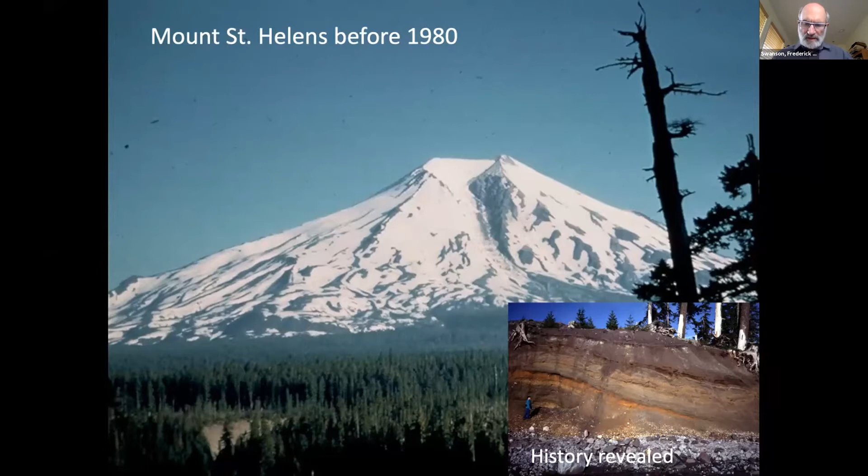But then 2 years later, boom, Mount St. Helens erupted violently on May 18th, transforming the landscape viewed in the upper right corner, looking here north from the summit of St. Helens across Spirit Lake to Rainier in the distance, transforming that forested landscape to the one below.

The cubic mile of the mountaintop peeled off and slid down the valley 12 miles, and a blast toppled the forest over 125 square miles in the middle ground here of this image.

I had the interesting fortune to go to the site marked X in the lower right-hand panel on day 10, May 28th, 1980, with a couple other geologists. And I dug a small pit in the new deposits, and I saw dangling in the breeze particles of the former mountaintop, dangling from spiderweb-like filaments.

I realized later that these filaments were actually fungal mycelia of burn site fungi, which had been triggered by the heat of the blast, although their adaptation to response to heat was an evolutionary consequence of the frequent forest fires in our region. These sorts of blasts are very infrequent and not of evolutionary consequence.

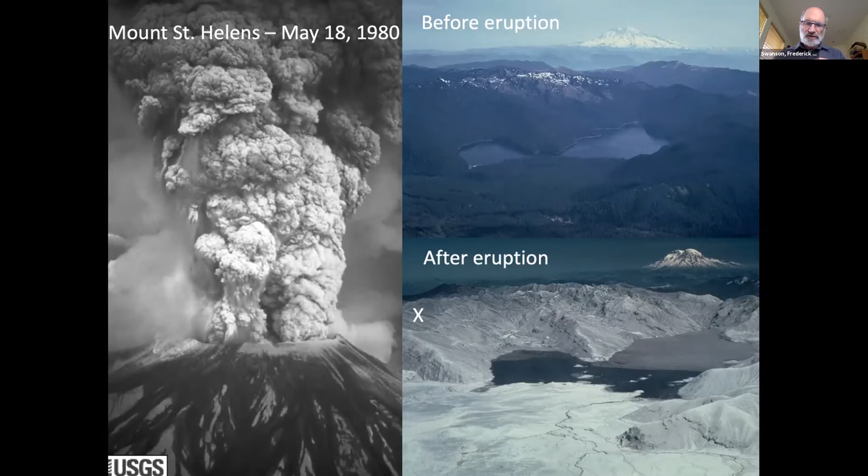I carried on after those early exposures and undertook some studies of the effects of different parts of the eruption landscape on erosion and revegetation.

So here's a sequence of 4 images. The circle shows a helicopter for scale. This was a site about 5 miles east of the volcano. It was a pre-eruption clear cut. You can see the stumps, and the remaining poles from the young plantation forest that was present for the eruption.

In the upper right corner, you can see where gullies had been cut by the early fall rains. And in the lower left corner, plants were coming up from the gully floors. Those gullies had cut down to the old soil surface and then stopped their incision, and the erosion then liberated plants to sprout from seed or rootstock.

This was an interesting aha moment in the sense that normally we think of erosion as detrimental, and in this case it actually accelerated ecological response. In the lower right panel, we see the forest starting to fill in, but it still got a lot of gaps, and tree establishment was rather slow.

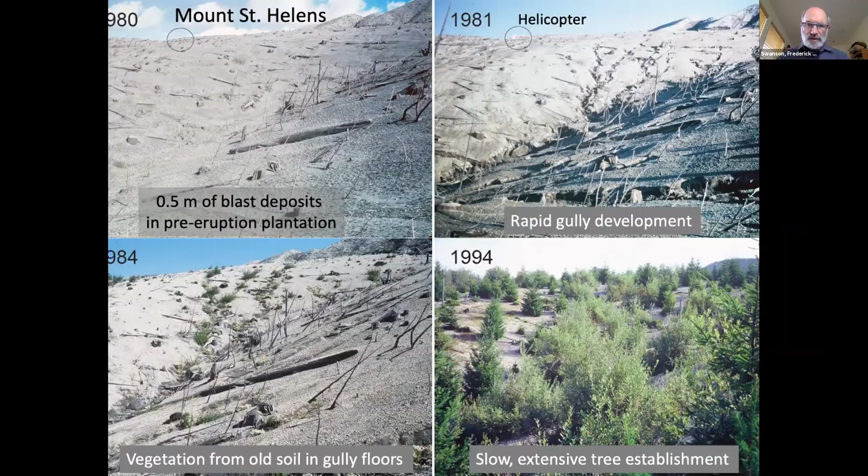So to summarize, these Mount St. Helens observations concerning history: the eruption history led to a prediction of the event. In terms of close-in observations, there are winners and losers.

There was an immediate response of life, and then there's a story about the burn site fungi. In terms of ecological responses, it's been highly varied across the disturbance zones imposed by the different volcanic processes, and that ecological response has been relentless and protracted.

Change in thinking: wow, it can happen here, it can happen now, and we need to really accelerate our hazard assessment and monitoring. The U.S. Geological Survey's Volcano Hazards Program had its budget ramped up tenfold, and that included helping other countries who have volcanoes

It was a venue for conflict. Should we go out there and restore the forest and freshwater environments, or let natural processes proceed substantially unimpeded? That was the language in the 1982 National Volcanic Monument Act, establishing a 110,000 acre monument centered on the volcano. But there were many points of conflict.

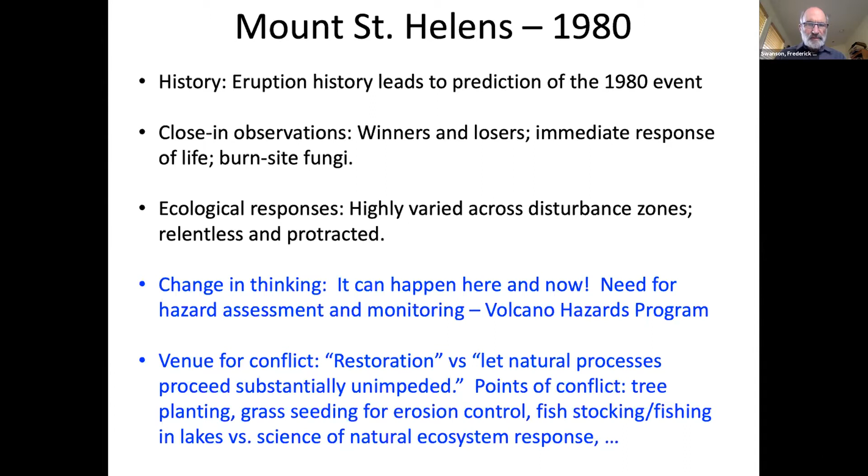Going to the second case, the forest wars. This is an image of old growth in the Andrews Experimental Forest up the McKenzie Valley. The Holiday Farm fire affected about 400 acres of the Andrews. This is a plot — you can see the aluminum tags and the two big old Doug firs here.

Old growth and the northern spotted owl were the subjects of obscure research in the 1970s in the Andrews, but it became a focal point for the battle over the future of forest practices on the federal lands within the range of the spotted owl.

So here's a legacy, a litany of the history of the timber era that developed after World War II in the Forest Service lands.

Ultimately, Federal Judge Dwyer imposed an injunction stopping logging on the federal lands, particularly to deal with the declining population of northern spotted owls. Then President Clinton and Al Gore convened a summit in Portland in April of '93 to try to find a way to get relief from the injunction.

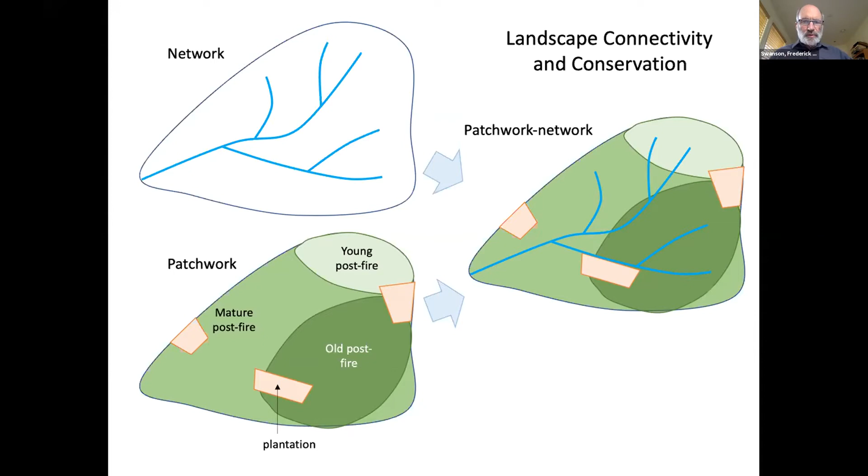So to summarize the forest wars conditions: first of all, the history of the progressive logging of the native forest under the timber era forest policy collided with directions for attention to ecosystems and other matters embodied in some of the federal legislation of the '70s. Other factors in the history pointed towards inevitable big change coming.

Close-in observations and concerns about interactions among networks and patchworks were key to understanding landscape connectivity and function, and therefore were needed in order to underpin how to design terrestrial and aquatic conservation strategies in concert with one another.

The ecological responses have been striking. We could foster old growth forest attributes in the landscape, but still see the spotted owls decline due to various factors such as wildfire, disturbance of good habitat, invasion of the barred owls, and perhaps other factors.

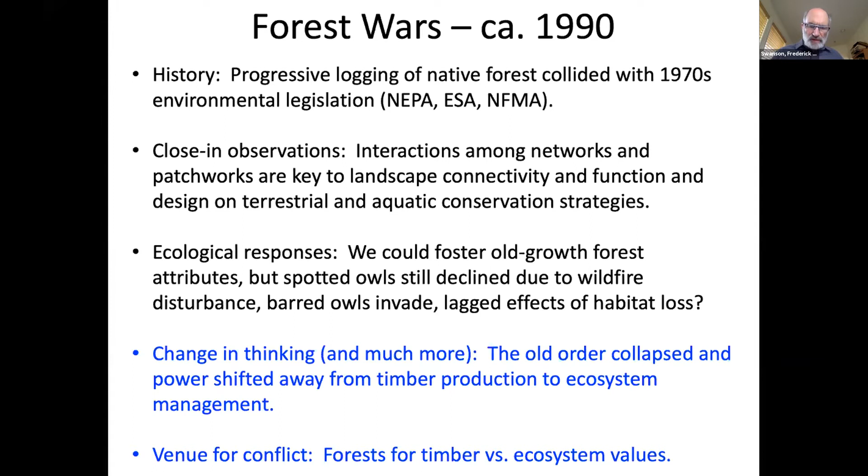So this change was a big change in thinking with huge impacts on people. The old order collapsed, and power shifted from the emphasis on timber production to ecosystem management. Here again, we had a venue for conflict over our values about forests.

The '96 flood is the third case, along with some other folks in yellow raincoats there. I had the opportunity to hang out in the forest during the flood and see its progressive development over several days. It was fascinating as we could see the passage of the flood wave, the debris flows,

the movement of large wood and boulders down through the landscape from the upper reaches of the watersheds and on down, ultimately to Portland. It was a big rain-on-snow event — note the snow there.

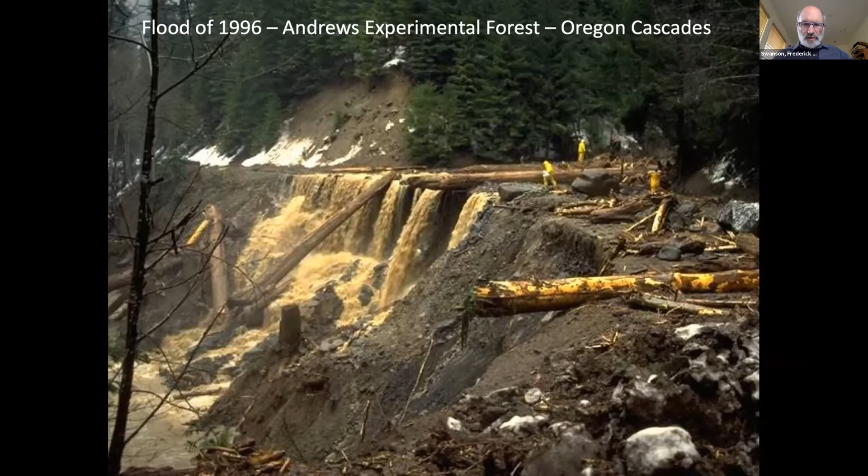His work has been done on the history of floods and their origin as rain-on-snow events. These are the events that make the big ones, but they're infrequent. We had the Christmas '64 flood, and then this '96 flood, and some earlier ones.

We have some long-term stream flow records indicating that they recur at intervals of multiple decades.

The close-in observations were about how the disturbance processes cascade down through river networks and road networks, and how those roads and rivers interact with one another. We'd had some long-term observations of aquatic ecosystems in small and large streams, and we could observe the impressive ecological resilience of the aquatic system to disturbances such as this.

We also had a change in thinking, that notion of roads interacting with streams to influence the routing of water, sediment, and disturbances was a critical perspective. Then that came into play in the conflict venue, which was to find the right balance between forest access and environmental hazards posed by roads, and how far to go in the name of watershed restoration with disconnecting road networks from stream networks.

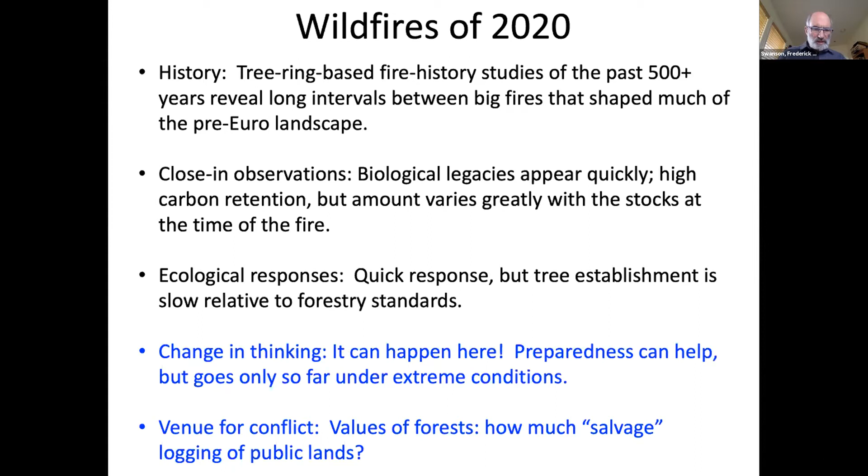Change in thinking again—it can happen here. Preparedness is helpful, but it goes only so far under extreme burn conditions, which we suffered in September. And again, this is a conflict venue, over surfacing our values of forests—for example, how much salvage will be deemed appropriate in the course of logging of public lands.

So some take-home lessons: big change events may seem like surprises, and yet they're expectable. On-site observations can prompt science discovery. Ecological and human systems are quite resilient, but they may occur at inconvenient timescales. There's plenty of need and capacity for new disturbance research, but the big challenges are human, are social. Expect uncomfortable change, and conflict.

For just a moment, let's step back and ask what's next. What is the pace of big disturbances in our region? Here are four cases—let's push your thinking back to 70 years or so.

We had the '62 Columbus Day windstorm, we had the '64 flood, and we have the pandemic. So we've experienced one big change event per decade on average.

And what might be the next big change event? Well, we've got plenty of candidates. We've got the familiar ones, big fires, but also ones we haven't experienced in our European occupation of the landscape, like a big subduction zone earthquake and associated tsunami.

So despite preparedness, our vulnerabilities may be increasing. There's concern about our infrastructure, communications, power and transportation.

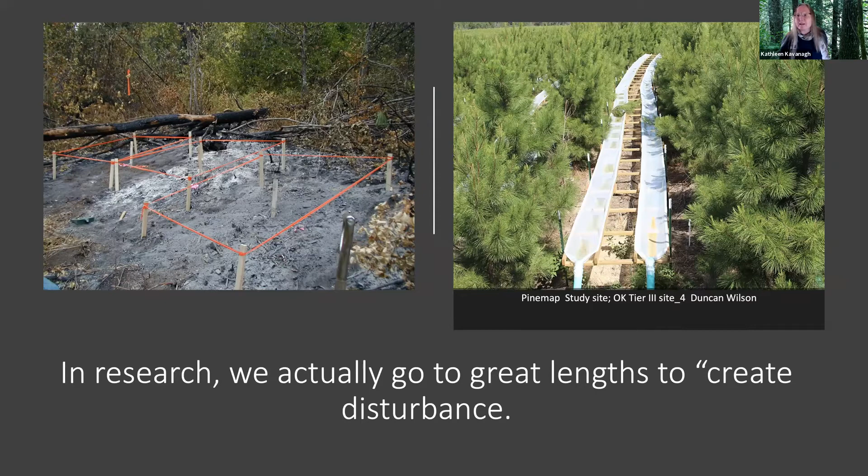So you've had a disturbance, and you've got to think to yourself as a researcher: what can you do following a disturbance? What's your response? As Fred so aptly said, the response is to get there, to open up the senses and think about what it is you can observe going on. And then the other part is we have these new tools in terms of remote sensing and a lot of other things that can help us see things from literally the 10,000 foot level. But how do you think about that in terms of research?

So if you think about who embraces conditions created during a disturbance, a disturbance that many people don't think about that relates to the natural environment is COVID, and basically the shutting down of human movement through big swaths of the United States. There was a massive response that was quickly noticed when the national parks closed.

All of a sudden bears were having parties in Yosemite, and we were seeing wildlife thriving. They were also seeing different species of wildlife in different parts of the parks. The people managing the parks often stayed behind, and they'd see, whether it was pronghorn in a part of the park they'd never seen pronghorn before, and didn't realize was even pronghorn habitat. So a lot of anecdotal thinking came out of that.

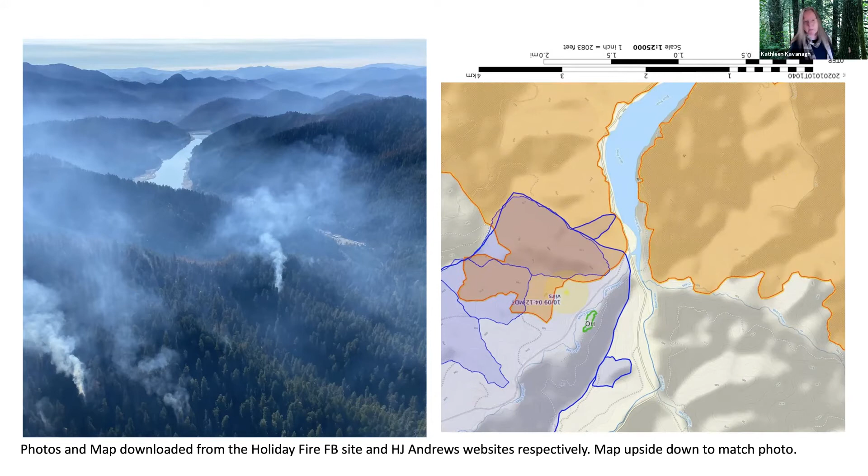They both had a fire. It wasn't as hot as the majority of the Holiday Farm fire — it was near the end when the fire came into this drainage. Suppression worked fairly well, but there was still a nice burn in the understory.

So, large changes. One of the interesting things is that the H.J. Andrews and the researchers there have decades and decades of data on how this system behaved under a variety of weather and storm conditions, and now they'll get measurements on how it responds to this disturbance.

Because this is heavily instrumented, with plots all over these watersheds, that assessment will be ongoing. It's almost the best of both worlds in this case, because the whole forest did not burn up, but at the same time some fire came into key places that will allow us to study and understand more about the processes that occur when a fire does happen.

Another critical site is one we have in the Metolius region, called an Ameriflux site, run by Bev Law for the last 20 years. It was burned over around August 20th, so before the Holiday Farm and many of the fires we saw on the west side, the east side was having its normal fire season.

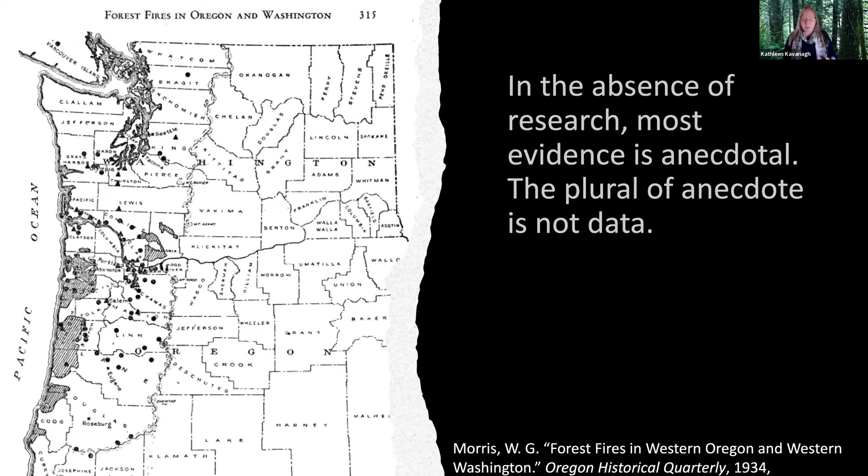As we look into the future, one question is how much we can rely on the past. If something developed anecdotally and we think we understand why and how, but we don't really have the data on it, we need to use the information we're currently developing to help us project into the future.

And that's where the data comes in. That's where the data becomes essential.

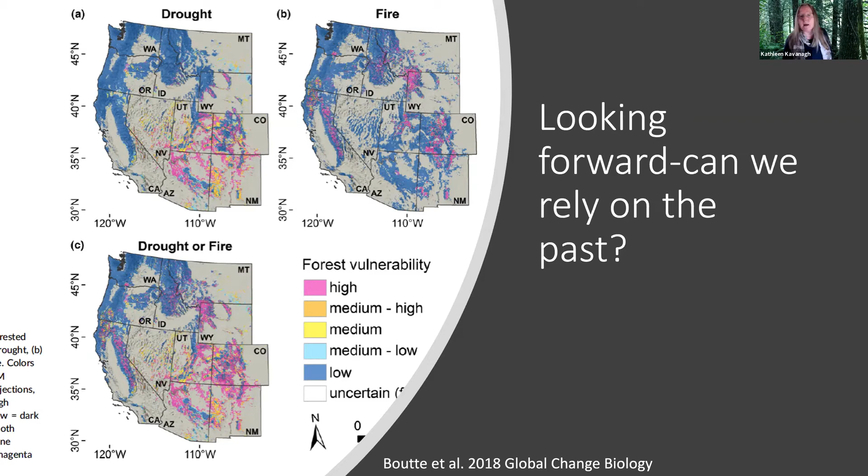We've had to respond to COVID also within our research community. So how have we responded? One of the things we initially did was basically shut down the system, no travel, everybody go home. Then slowly we were able to rebuild to demonstrate we could travel safely.

We could continue, especially to do our field research very safely. We were able to have over 247 individuals permitted to travel to go out and collect the data that was essential to keep the research enterprise going through COVID, and to collect data essential in terms of the timing and history of the record we needed to capture.

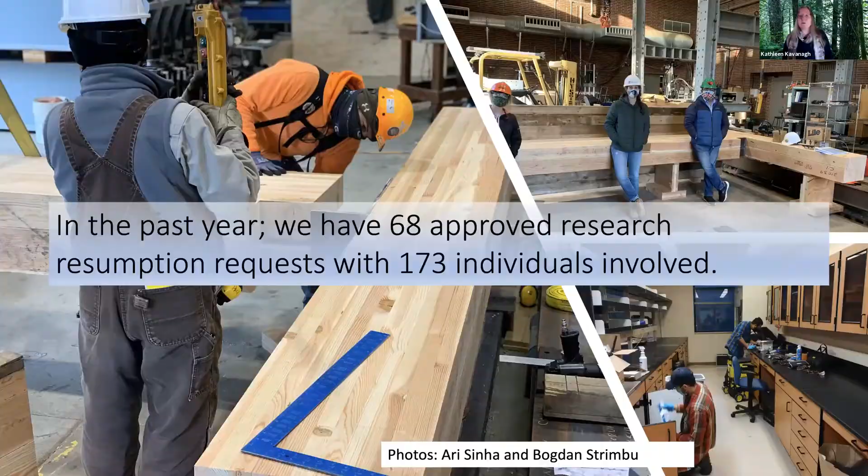We also worked very hard in terms of research resilience to get our field and indoor researchers going again, trying to figure out the best way to do that in a safe manner. We went through a massive assessment of research and what we could approve, and what safety and COVID-related changes we had to make. We had about 68 approved research resumption requests with 173 individuals.

So again, much like the resilience of the natural system, we also saw a lot of resilience amongst the human system and amongst the research we were conducting.

In closing, I'd like to say that we look forward to a future in forest research that does involve disturbance, that occurs at process level research integrating disciplines, much like Fred talked about as well—biological, physical, and social sciences really need to come together as we think about these things.

We'll work across multiple scales, from large wildlands, outdoors, and managed forests, all the way down to the sequencer lab—whether we're studying eDNA, tree improvement, or whatever, we're working across multiple scales.

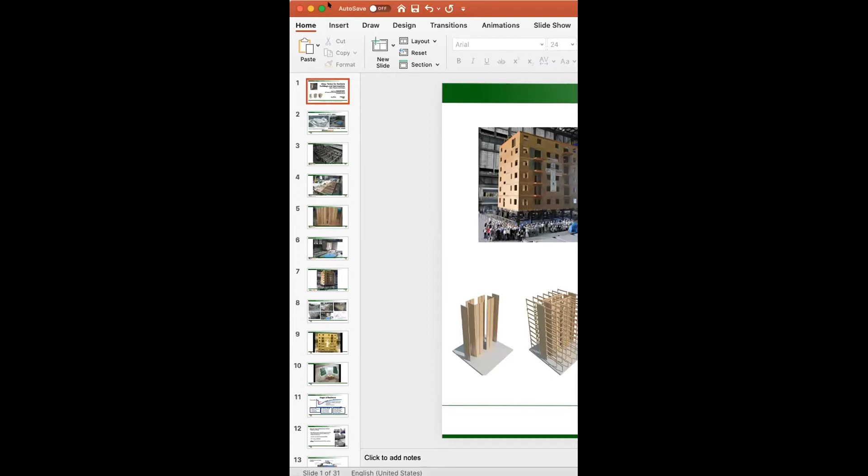So let me introduce our next speaker, John van de Lindt, currently the Harold H. Short Endowed Chair Professor in the Department of Civil and Environmental Engineering at Colorado State University. John has conducted nearly 50 research projects on buildings and other systems related to earthquakes, hurricanes, tsunamis, tornadoes, and floods. Between 2005 and 2013, he led projects that used the world's largest shake table to run tests on 2-story, 4-story, and 6-story wooden buildings—I think we're going to see some videos of those during his presentation. John serves on the American Society of Civil Engineers Executive Committee for the Infrastructure Resilience Division, and he's secretary of the Structural Engineering Institute Executive Committee.

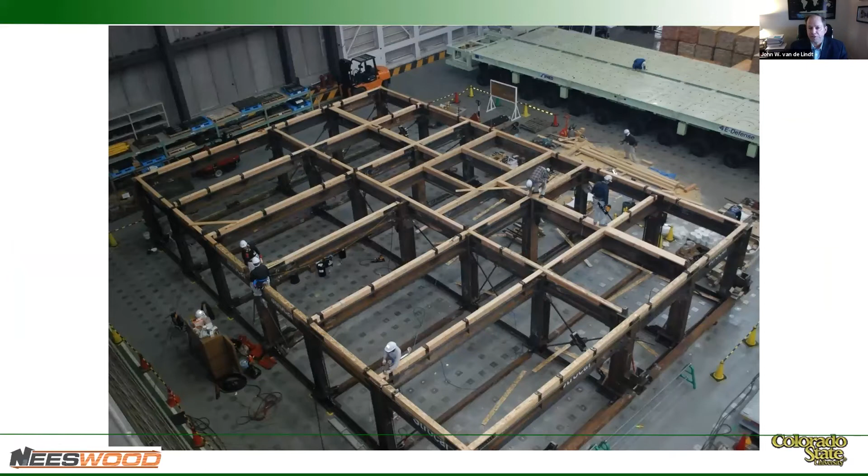Here you can see this is a steel moment frame that's going to be used to lift it onto the table. You can see our interface, and I'll go through this kind of quick—I want to make sure we have time for Q&A. I think the photos can do it justice.

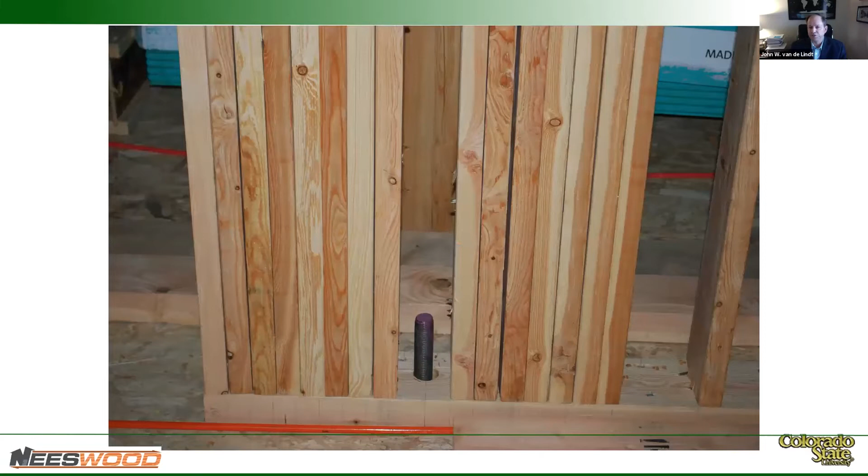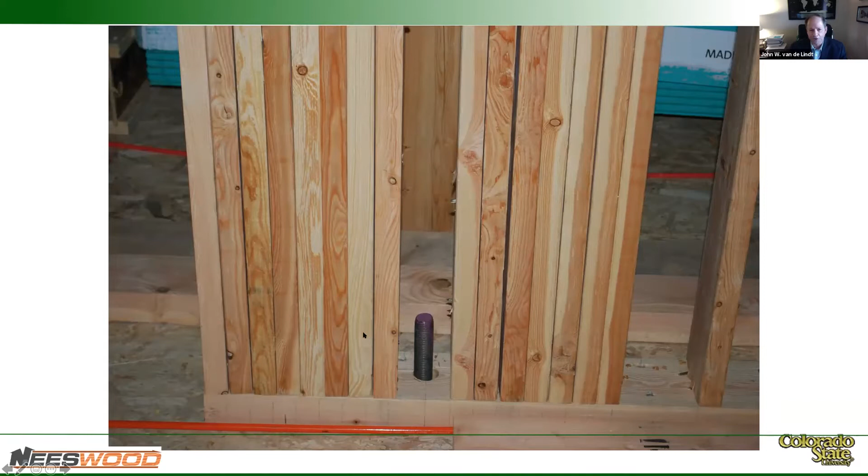Here we see what's called a stud pack at the end of a wall. Then, to take tension, we'll have steel rods that go up the height of the building. The building will be 6 stories in this case. The goal here was to design this using a new method at the time, called performance-based seismic design. That method enabled a certain level of performance for a certain intensity earthquake.

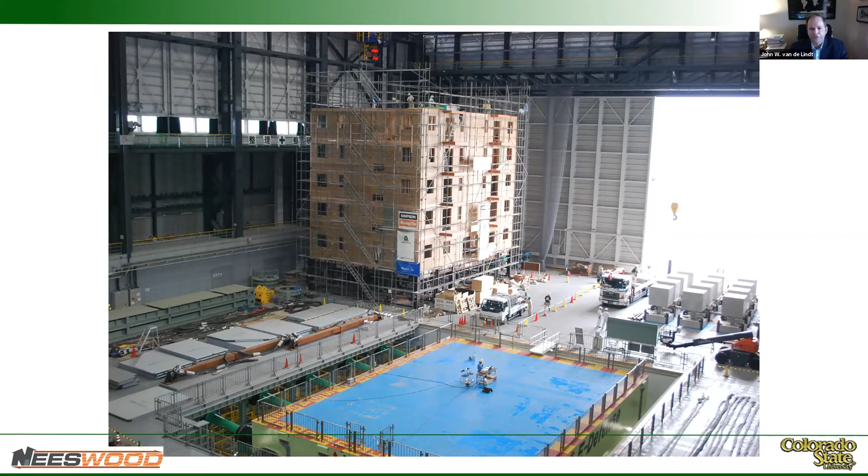Here you get a feel for the lab up to 5 stories. This is test day—there were a series of test days of smaller shakes, and then this is the big one. This is the damage inspection crew that goes in; we only have about 90 minutes to inspect the damage until we run again. That's why the crew's so large—I think I'm down there somewhere.

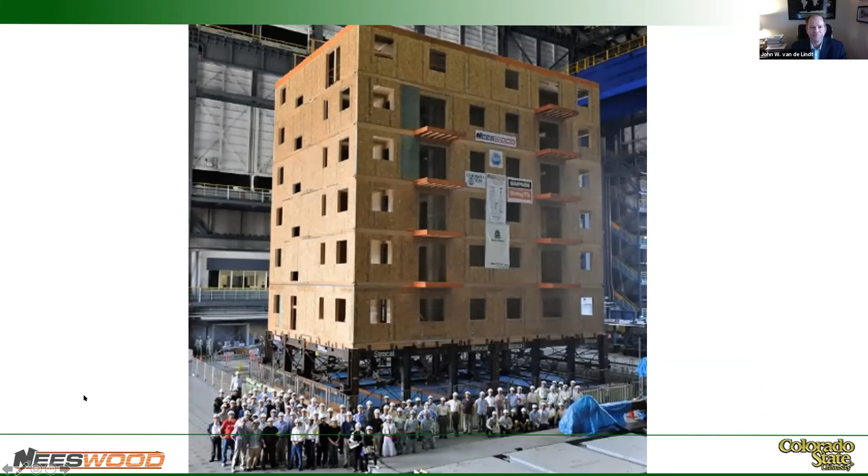This gives a feel for some of the construction over time. Here's the shake—I'll start this since there's a little lead time. You can hear them counting in Japanese; they'll then count down in the control room again while they check instrumentation. This building weighed about 800,000 pounds, used wood and wood products throughout, plus connectors, and had more than 1 million nails.

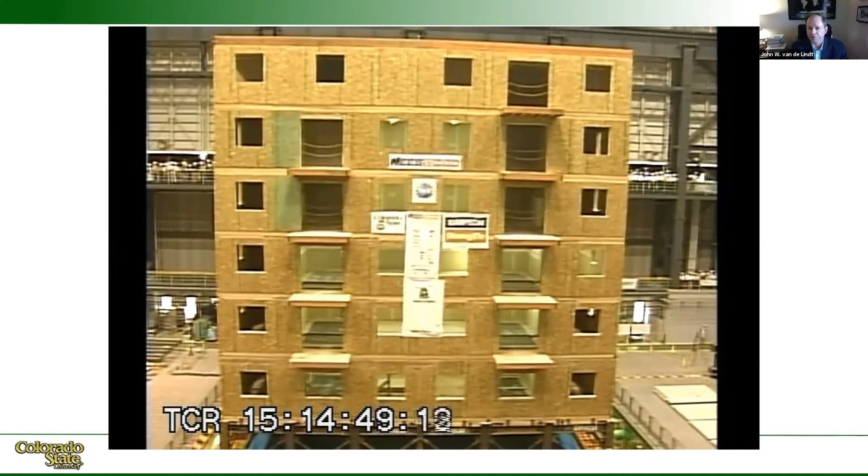Give you a second to reflect on the movement. It's fairly stiff, and that's what we want to see—some stiffness, but to get good performance we don't want to see it displace too much for fear of collapse. However, when you get displacement, this is up on the 6th story, set up to look like someone's kitchen nook. This is about 35 feet up in the air. You can see people watching from a platform down here—they're far enough away, they look close, but they're not.

What happens is you get the stiffness, and it increases the accelerations. So now you're going to see what happens with acceleration.

And so these are, to use Katy's words from earlier, these disturbances we create because we can't wait. We can't build a building and wait years, decades, even longer to study earthquakes.

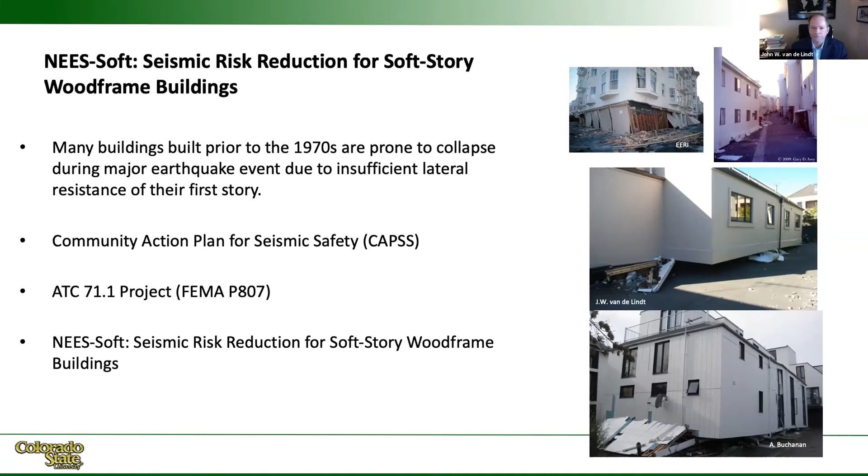And of course, similar to Mount St. Helens, we can't predict exactly when.

So this project, we looked at a number of different retrofits, had construction, testing, and I'll run through that in just a second. We used cross-laminated timber rocking walls as a retrofit. We partnered with a corporation to look at steel special moment frames just in the bottom story so the tenants wouldn't have to move out. These are often 4-story rental buildings.

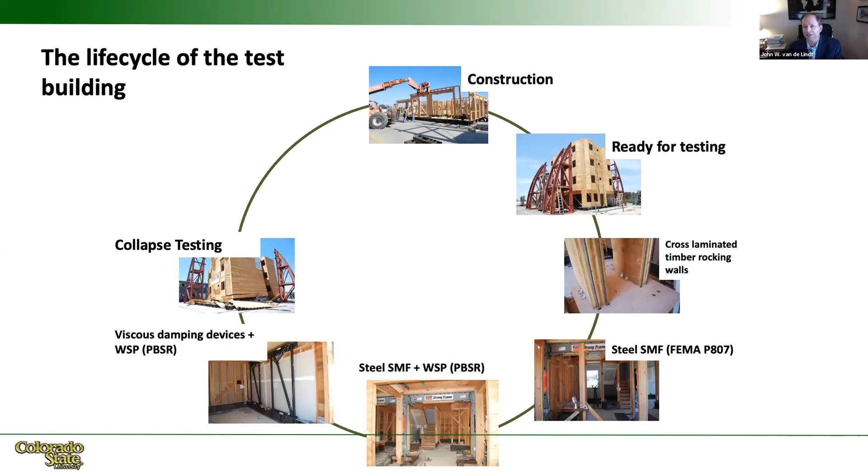Ultimately, we took all the retrofits out and performed a collapse test so that we could develop models and understand how these buildings collapse and how you model collapse.

So just some quick construction photos. The steel is just an interface plate to get into the table and fasten it down—that would be like your concrete foundation in your house. These are soft story buildings, meaning this is a very soft and weak story. On this first story, you can see these huge garage openings, and the fact that there's really no stiffness in that bottom story to resist the motion.

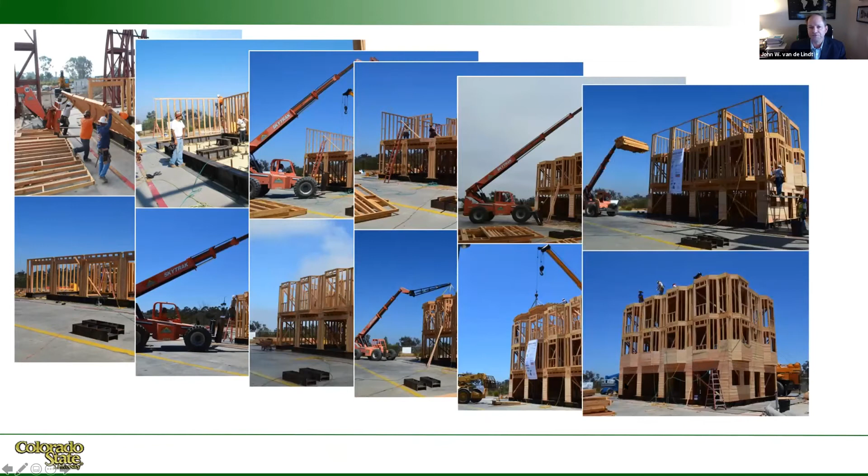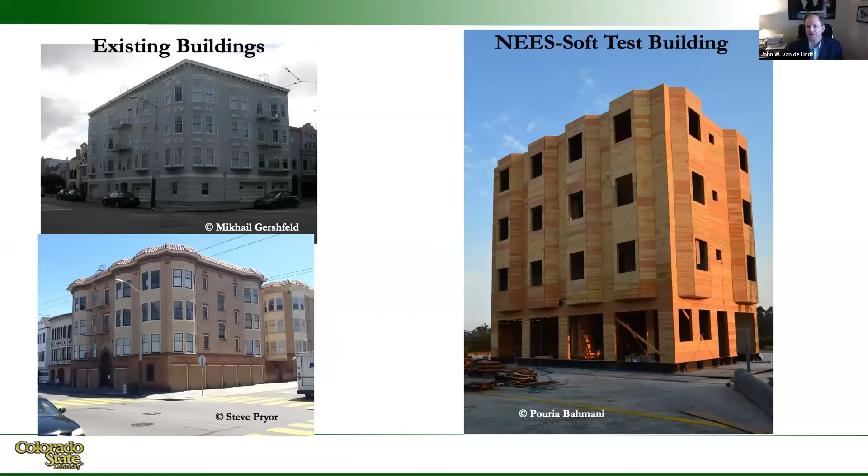So these are the buildings that we're trying to model. In research, we can't pull one of those out and test it on a shake table, so we do as much as we can to reproduce that. Here you see our reproduction on the shake table to the right.

So in the interest of research, as I mentioned, we had tested all the retrofits. We pulled those out, and then we looked at the collapse of the building.

You'll hear a very enthusiastic research undergraduate student who's doing the filming here in a second. He helped construct the building, so he was entitled to narrate, apparently.

And so this is a very large ground motion. This is what's called a maximum credible earthquake, so this has a return period of 2,500 years. We wouldn't expect this, we don't expect it to occur, but again, it's a return period—it could occur at any time.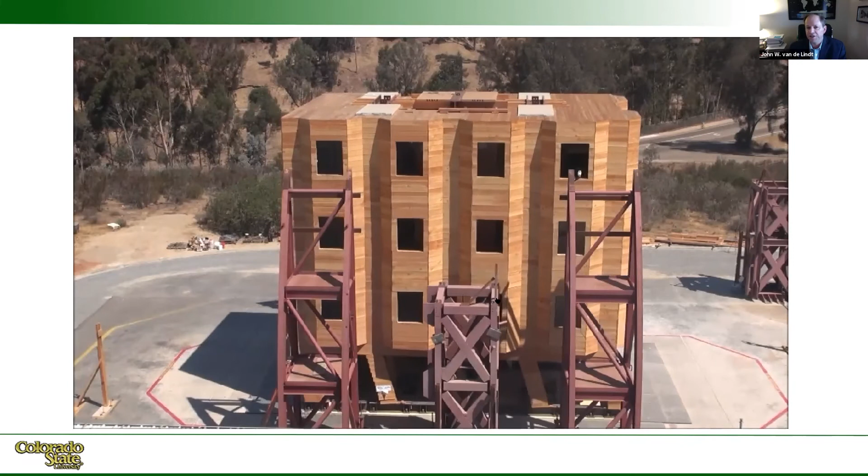And then these towers are just there to protect us, because you can see we need that. We're actually sitting right behind here in a 2-story building, so.

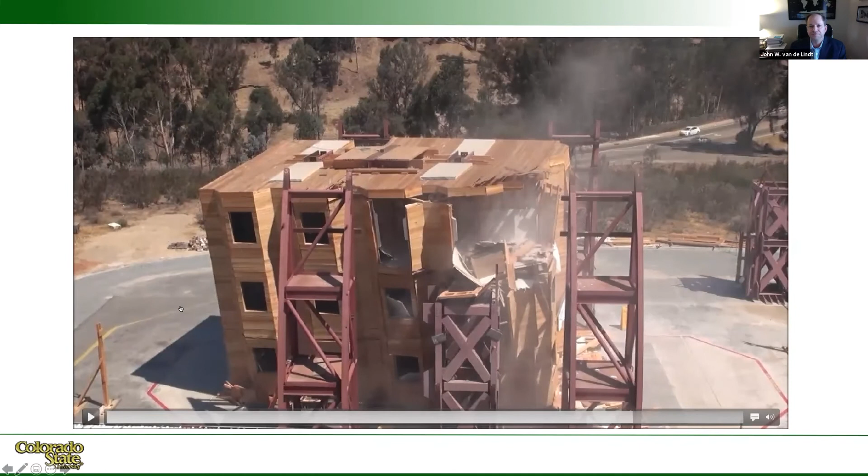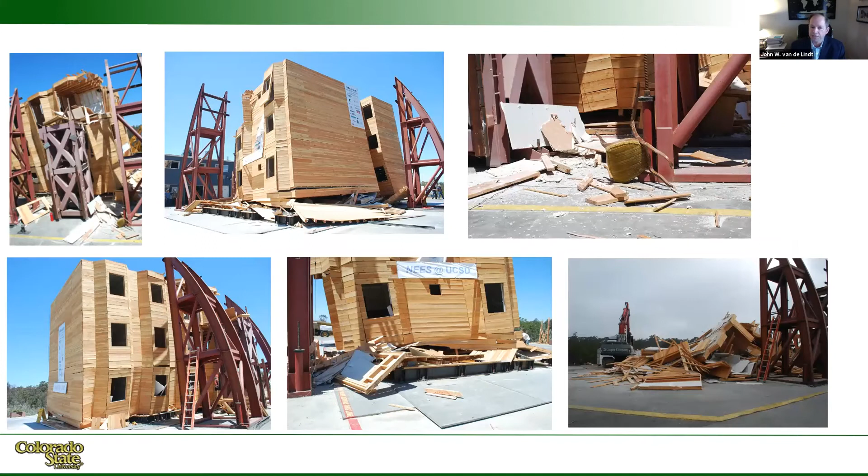And so essentially this 4-story building is—there's an apartment in the bottom story, as well as that would have been the street direction, and it would have fallen out on the street, as you can see.

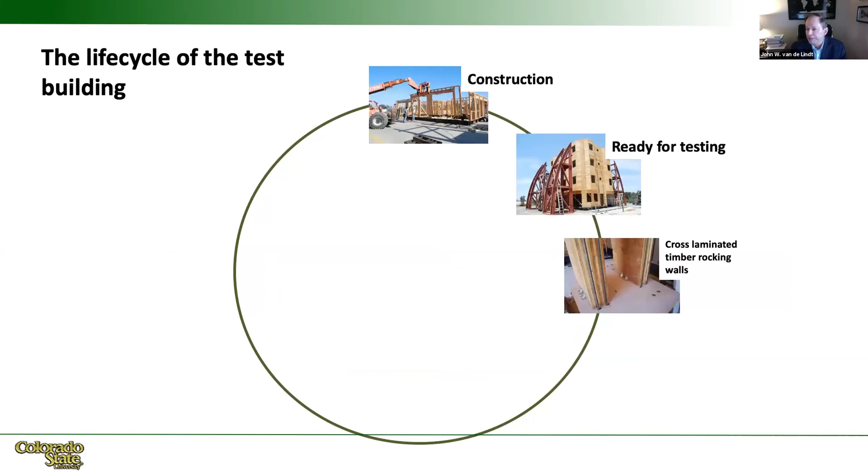As a reminder, we look at different retrofits to try and make these buildings safe, but also to make them resilient. All of those were very successful. The shakes are interesting, though they're not as fun to watch as the collapse test.

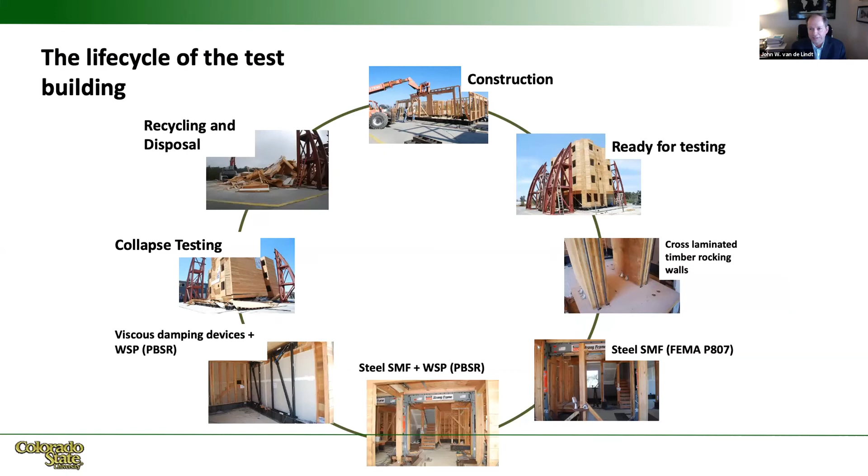So a project led by Shiling Pei at Colorado School of Mines, pictured up top here. This has been a collaboration with Oregon State as well recently. Back in 2017, this was to look at post-tension cross-laminated timber rocking walls. These are massive walls—you can see just a 2-story version here that goes up the entire height of the building.

Of course, they get spliced, and then steel rods are put in, and they're allowed to rock, dissipating the earthquake energy that way. This is a video that was professionally produced, as you can tell.

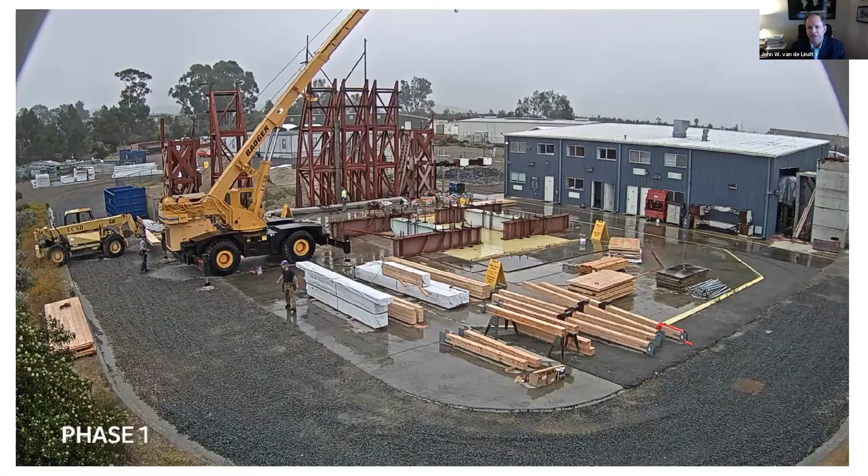This was a 2-story test set up as a proof of concept, because we are going to be testing next year—we'll be testing a 10-story building. This is about a 2-minute video; I'll just play it as I try to narrate, since it's just music.

You can see here various mass timber products going up, glulams, and they're laying in the floor system, which is cross-laminated timber.

And this is going to be 2 stories. There's also some bracing on here. Everything is set up as pins, so it's allowed to rotate.

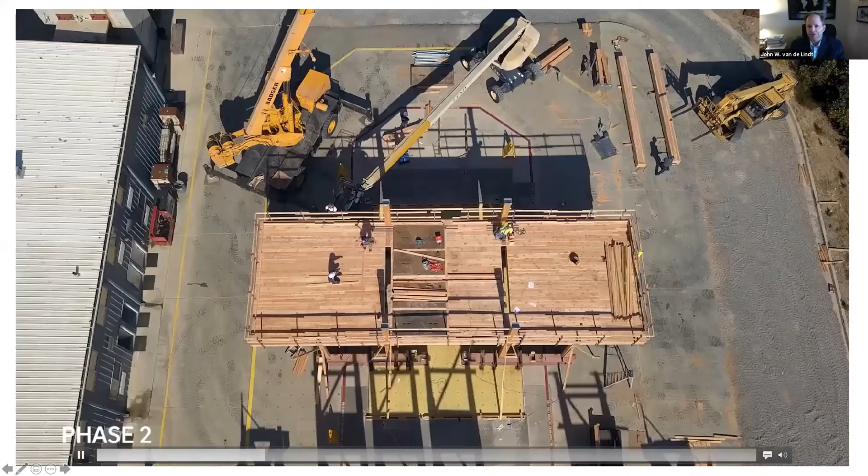And then there was a composite design for one floor system. So you'll see some concrete overlay go in, a light concrete overlay on the first, and then on the roof level, excuse me.

And then here we see our panels going in. This floor system design was led by our colleague Andre Barbosa and Arijit Sinha at Oregon State. That was the collaborative part.

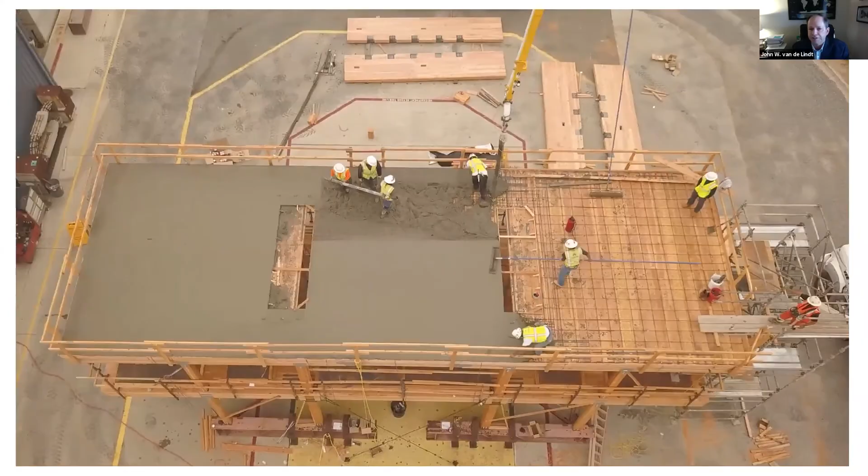And so here you see the concrete going in, and that's to get a composite action, and also for soundproofing or sound insulation.

Now these holes you see here, this is where we're going to drop the panels in—these are the post-tension rocking walls. Of course, they're not post-tensioned yet; that'll come in.

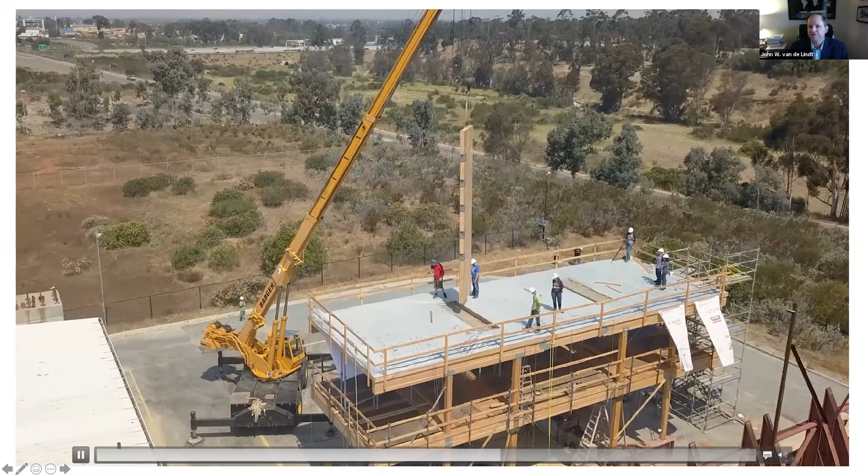And this is the control room that I mentioned where we were sitting. In the other test, the towers were right here, keeping us safe. And so we've got one dropped in there.

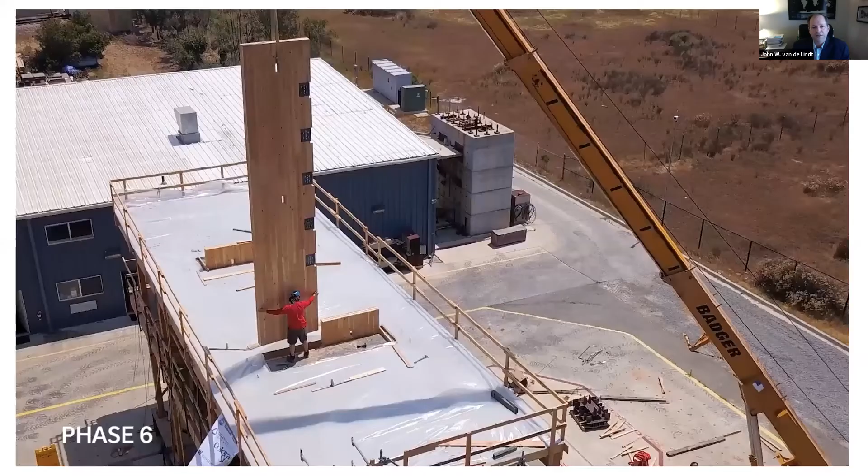And they'll get coupled right here, mechanically coupled with steel, which helps dissipate energy as well. In the 10-story test, these will be put in 2 or 3-story sections and have to be actually spliced—obviously, you can't drop a 112-foot panel in, or 120-foot panel.

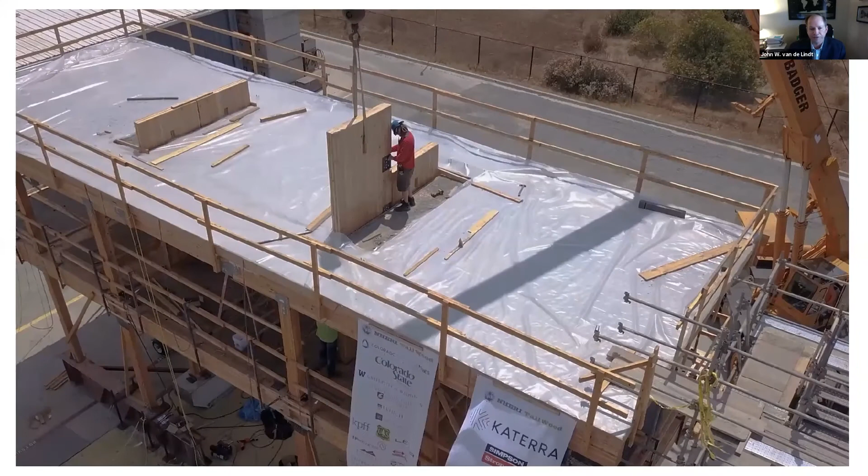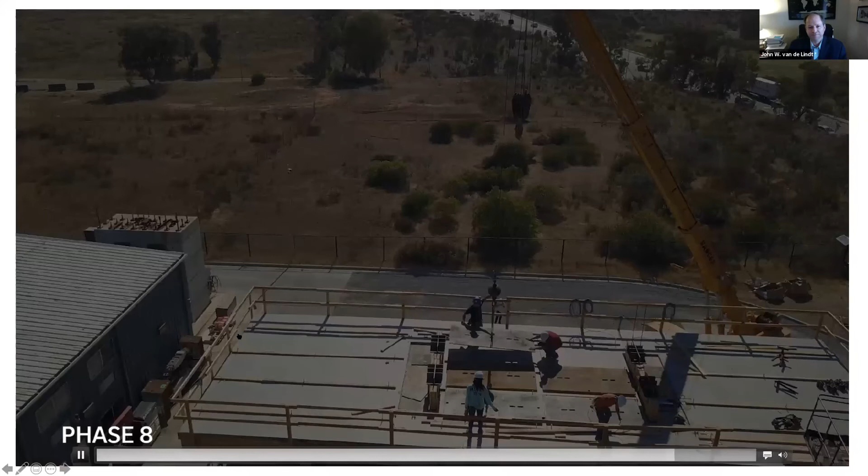And then these are put on, and the steel rods will come up, and these will be post-tensioned to dissipate the energy. Then steel plates are added to bring us up to seismic mass.

So I'll go ahead and jump forward. Here we can see this is a test—these should be synced, and here you'll see the wall rocking. Here's the post-tensioning steel rods, and the students who worked very hard on it are watching back there. You can see it taking all the ground motion energy and dissipating that.

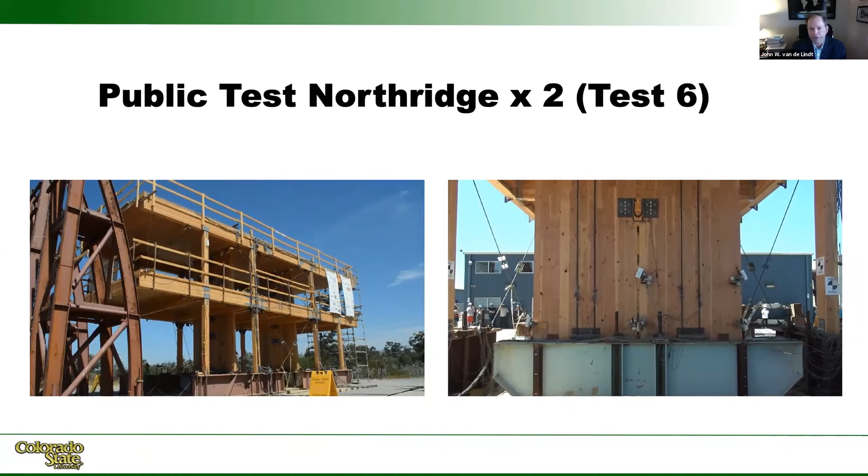Now the amazing part of this is we ran this twice. I'm going to show the other one—this is the corner of that wall. The idea is this is going to rock, so you're looking over here, and here you can see it starting to lift.

And the amazing part is that it's really not being damaged, and we're getting what's called 5% of drift—meaning 5% of the height, which is a huge drift. It's about 250% of what's allowed in typical design for buildings.

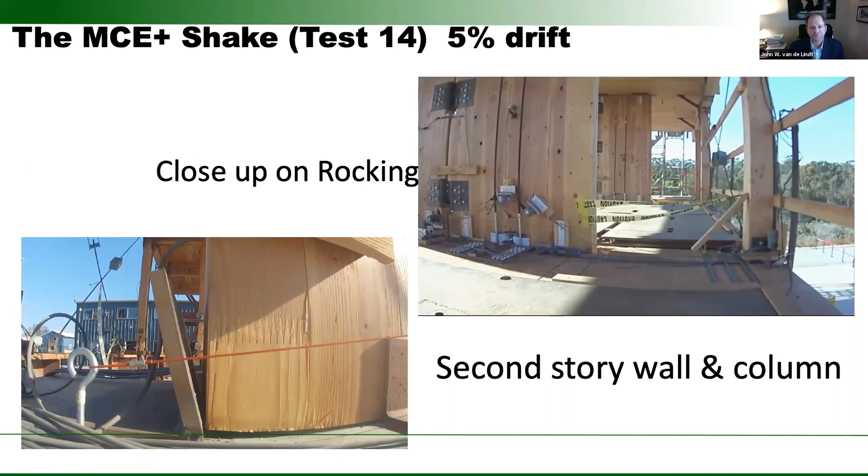So what you notice is after 14 earthquakes, very large earthquakes in some cases, there's almost no damage to the cross-laminated timber rocking wall, meaning the whole system itself, thanks to the wall, is resilient.

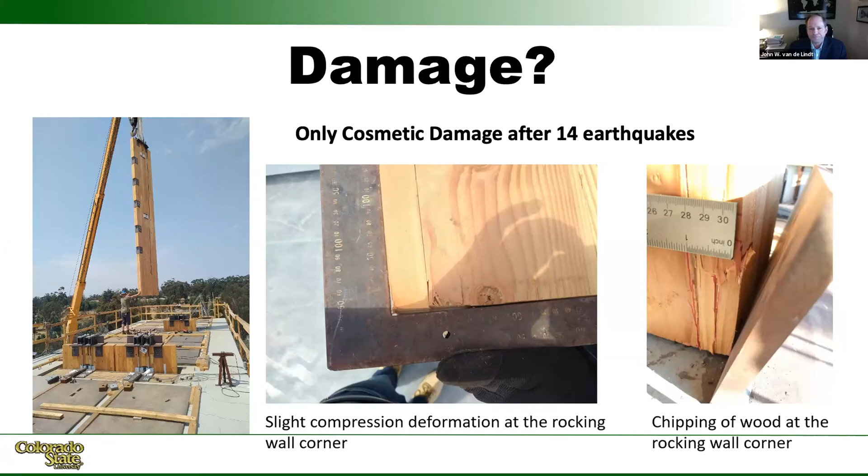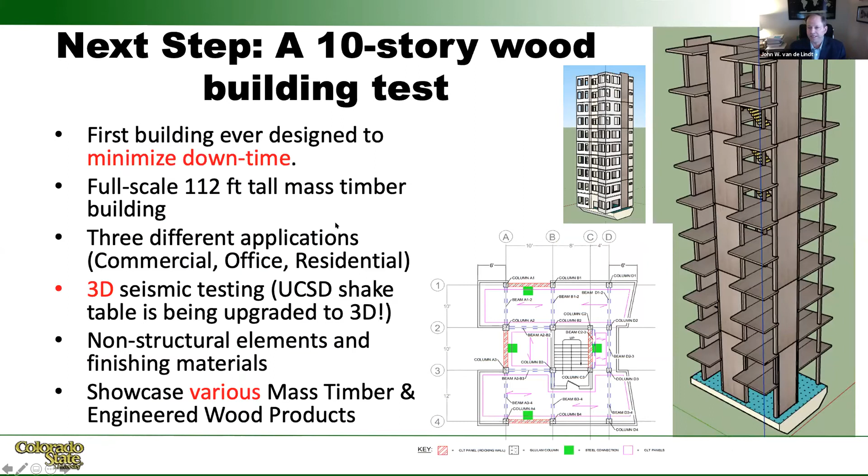So the next step is a 10-story test. We're actually in a holding pattern waiting—they're upgrading that shake table you saw going in one direction. They're upgrading it so that it'll be 3-dimensional, which is fantastic, but of course we have to wait 18 months for that upgrade because it's quite an undertaking.

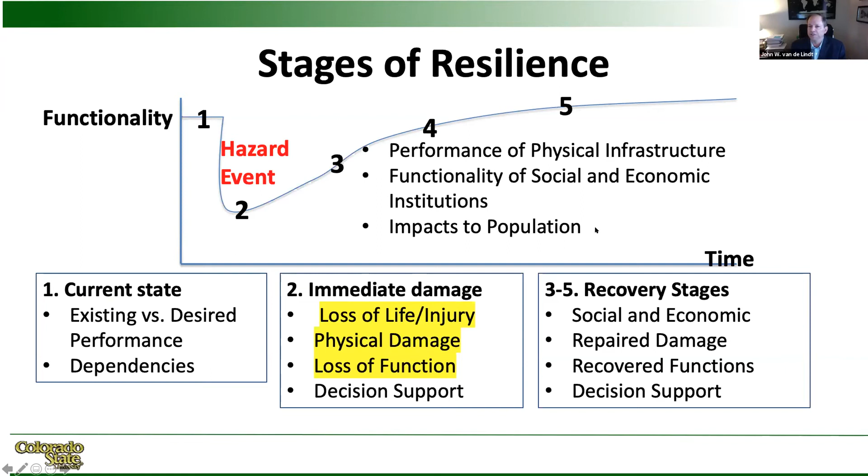So as I mentioned, these resilient buildings protect loss of life, reduce loss of life, or hopefully eliminate it, reduce injuries, prevent physical damage to the buildings, and improve their functionality.

Lastly, one project we worked on while some of this was going on was putting cross-laminated timber into the U.S. design code. I show this maybe a little bit just for humor, but this is really the process to get something into a design code in the U.S. I hope that clears it up for everyone.

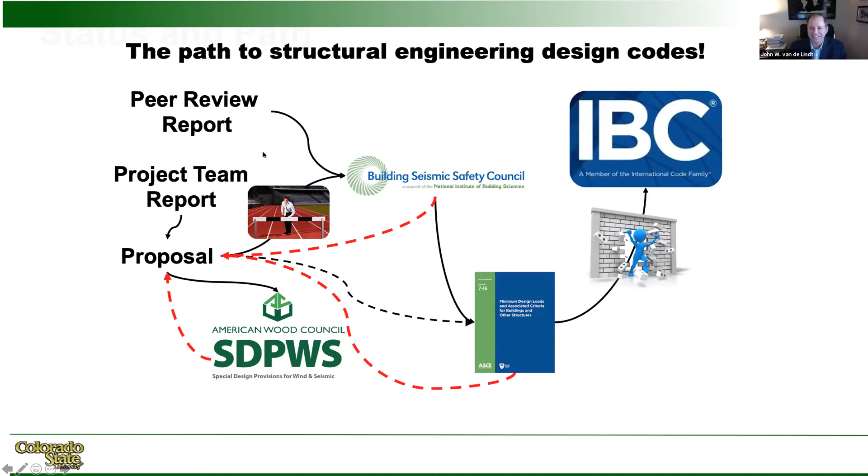But this is the process, and we're fortunate that in the 2020 NEHRP recommended seismic provisions, you can now see cross-laminated timber shear walls, and cross-laminated timber shear walls with shear resistance provided by high aspect ratio panels. So we have the factors needed for engineers to design these efficiently and at a lower cost. That's the goal, to enable the use of wood products in seismic design.

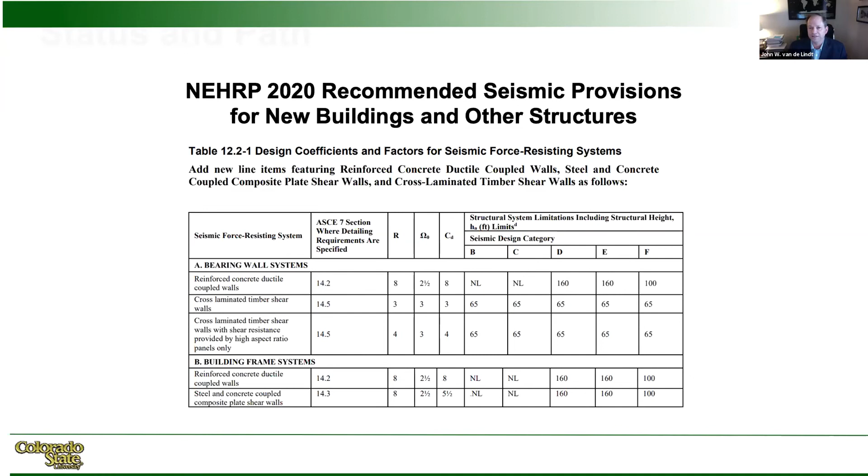So looking forward, just my closing views: mass timber buildings will continue to get taller and taller, certainly in the Pacific Northwest, where we're seeing a lot of mass timber activity and design, but also around the whole US. As you know better than anyone in this audience, research and development is underway worldwide.

The price points for mass timber right now are a little tall. I think they need to decrease for these large 3- and 4-story massive apartment complex projects. I'd really love to see that with tilt-up construction and things like that.

And then advanced technologies—you saw the viscous fluid dampers we had. They worked great, but advanced technologies have a place in enabling a lot of the mass timber projects and buildings around the US and around the world. But there is some work needed to move some of the theory into reality, and I see a lot of those projects over the years going forward.